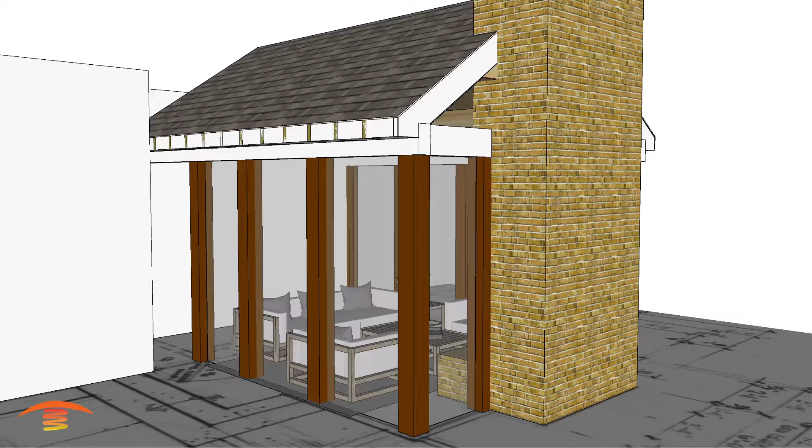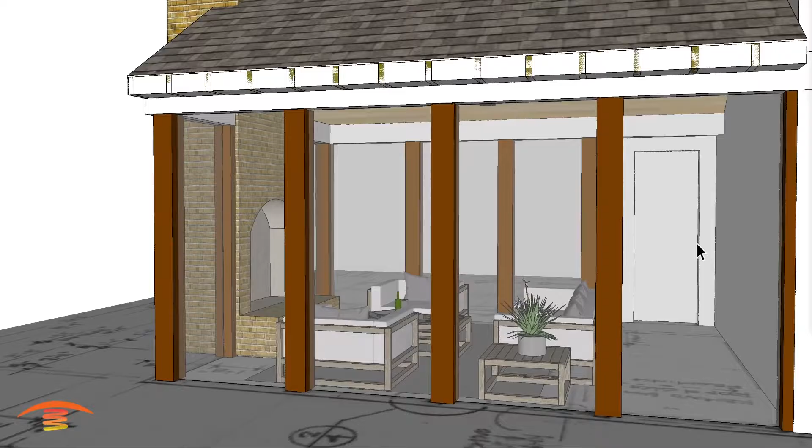Now let's get heating. All right, so here we have this residential screened-in application. And you can see here we have a doorway. I believe there are windows over here. There's a fan here in the center of the room. Fireplace over here, and basically seating for 4. They said I have it for 5, but it's right below the fan itself.

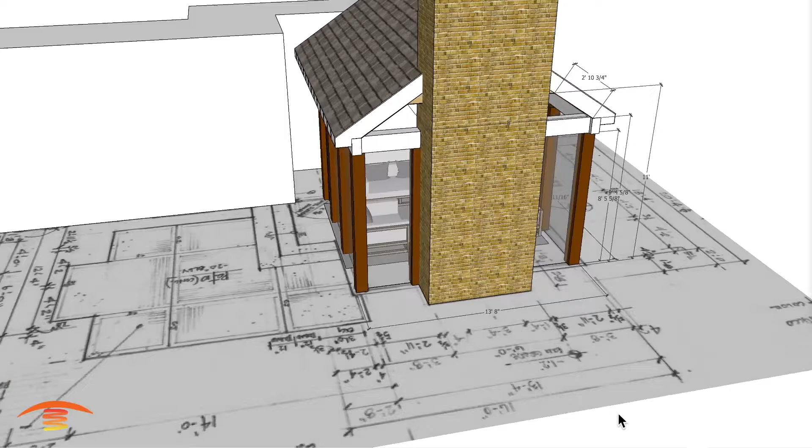And let's go ahead and look at the overall dimensions here. So overall dimensions, you can see here is the floor plan. Total distance that they show is 13.4. I have 13.8 to this edge out here, which is just slightly further out than their point here and here. You can see that my support posts are just slightly further out, a couple inches. But in any case, I try to match it up to the floor plan itself.

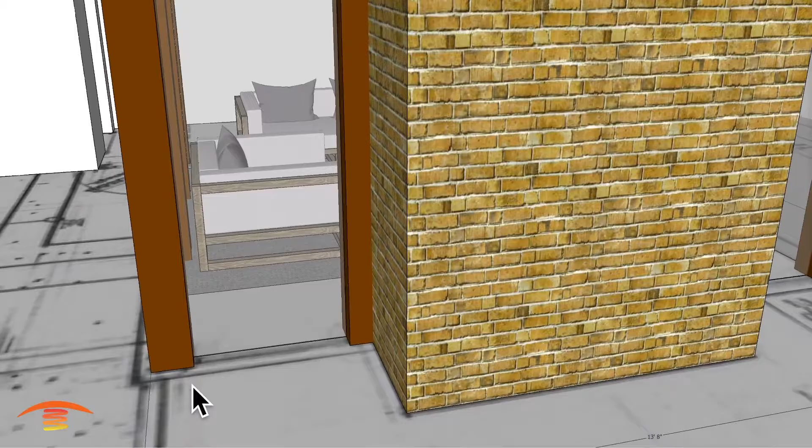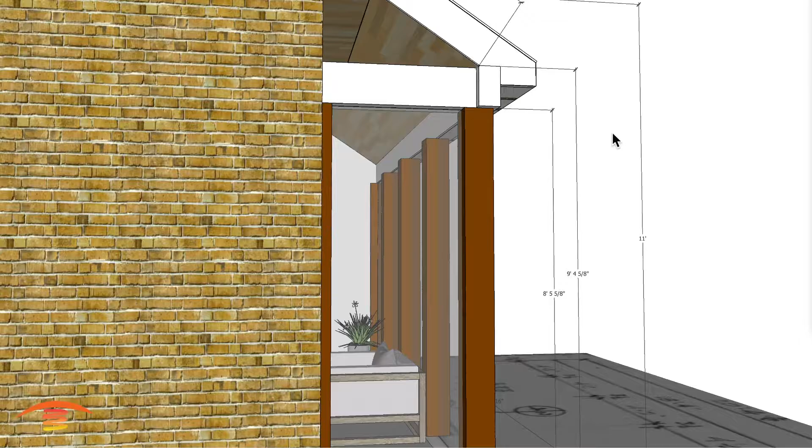We have this 13.8 by 18 almost 4 from the outside edge here to the residence itself. And then we have some different heights here. I have 8'5" to the bottom edge of this beam coming across here, and that one there. And then to the top of that beam is 9'4" and 5/8. And then there's a flat ceiling surface up here that is at 11 feet off the floor. And then a total width over here of approximately 8 feet.

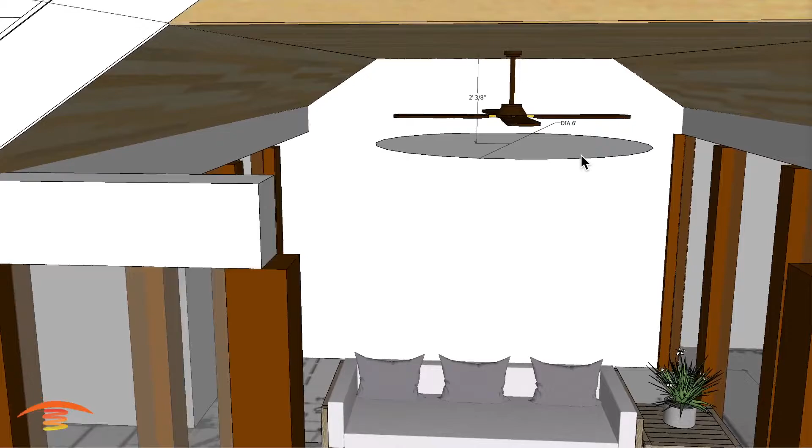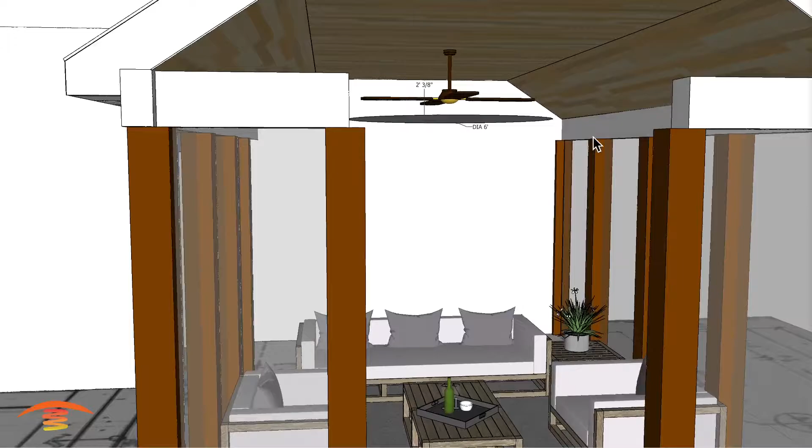I'm gonna go ahead and turn off the fireplace here just so we can see things a little bit better. We do have a fan here in the center, like I said, and I have it at 6 foot diameter. I also have this marking here at 2 foot 3/8 off the ceiling, and I'm just trying to match it up to the edge here, I think is what that truly is. But this slope section here I have at 2 foot 10 3/4, and I believe that's about it.

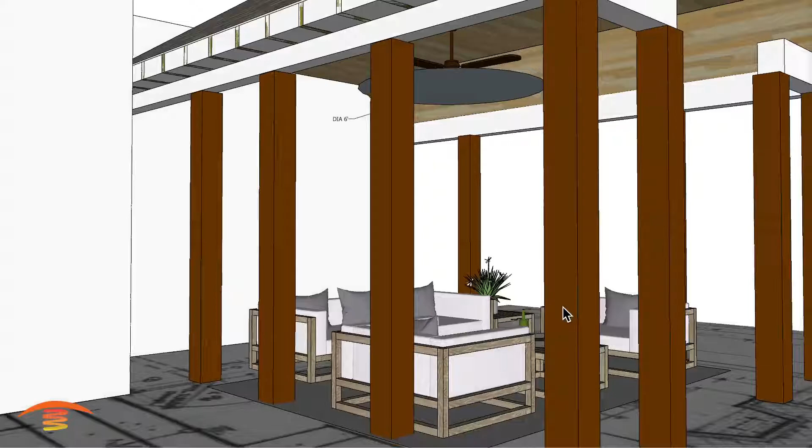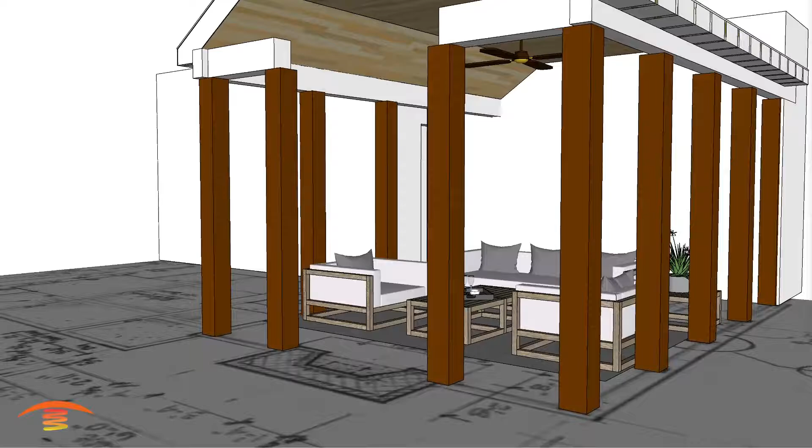I'm also going to turn off the screened-in portion here so we can maneuver through here a little bit easier. So that's all the dimensions, and let's go ahead and look at the different options that we can come up with. So let's turn off the dimensions. And first of all, the client showed heaters that were placed there already on their design. I think it shows over here somewhere, but in any case, they were listed as the WD series. So let's just pop that in here real quick. There we go. And so these are the WD 6024s, so 6,000 watt 240 volts.

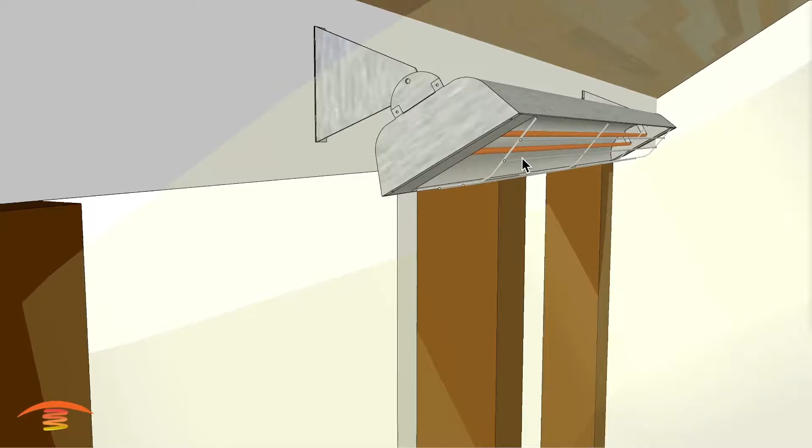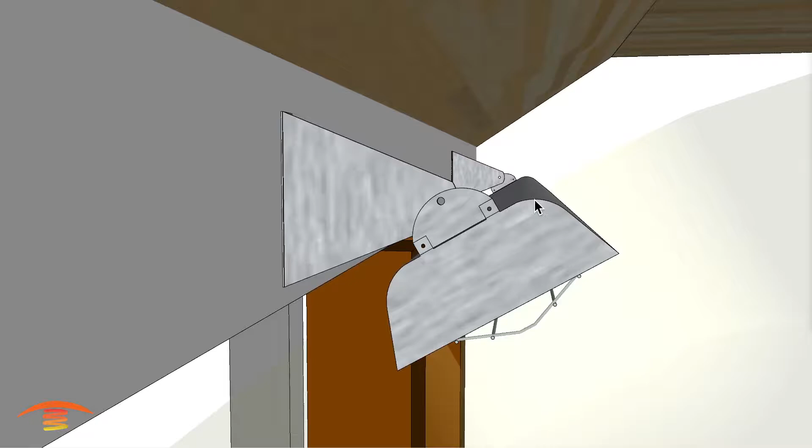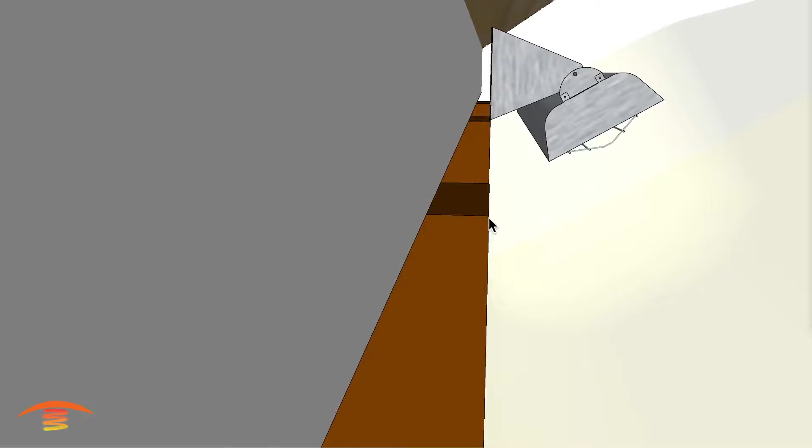The WD series has the brackets mounted on the ends on each side, and also the clearances have to be met: when it's mounted on a vertical surface like this, it has to have 12 inches of clearance to any combustible above it when mounted on a vertical surface and 30 degrees tilt. You can see here my mounting isn't quite right because I'm not sure what these true posts are and what this true beam is, but I matched it up to the inside edge of these posts here so that we can measure it at 12 inches from here to here.

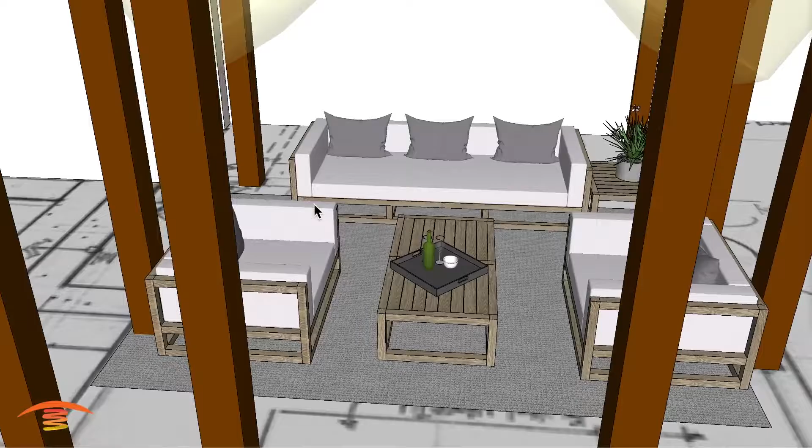It is in the center of the room, and quite frankly, this is a good design. There's nothing wrong with this, especially since they're designed mainly for seating for 4 here. Obviously the fireplace is over here, so seating for 4, this should work out just fine. Let's go ahead and look at the footprint of heat. And I'm going to go ahead and turn off the clearances here. The array itself is fairly good coverage for this whole space.

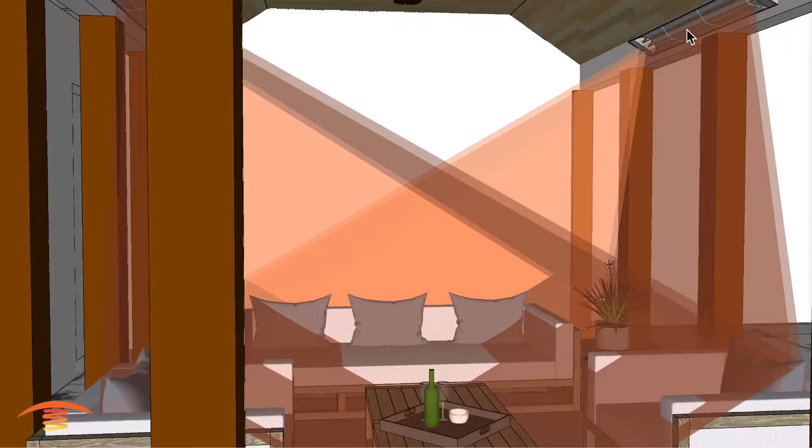6,000 watts, so it'd probably be too warm here in the center. So you might want to use a dimming system or duplex switch where you can turn one element on, one element off on all 4 elements essentially. And or use a controlled dimming system where you can turn it to 100% or 1% on.

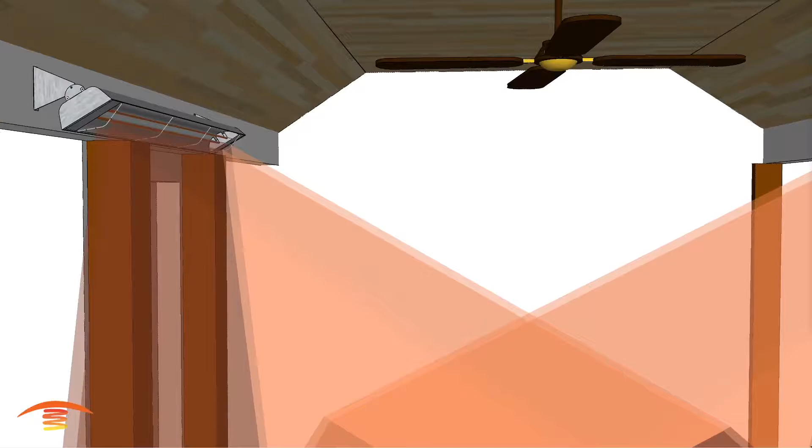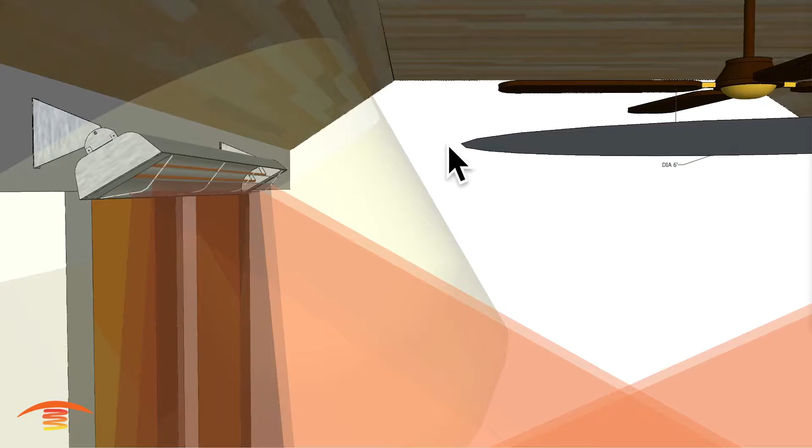So I think I mentioned the clearance here. So clearances, no problem with the fan here at that 60-inch dimension. Let's turn that back on here. We got quite a few more inches to work with, and 6 foot diameter. And let's see if there's anything else here. I think that's about it.

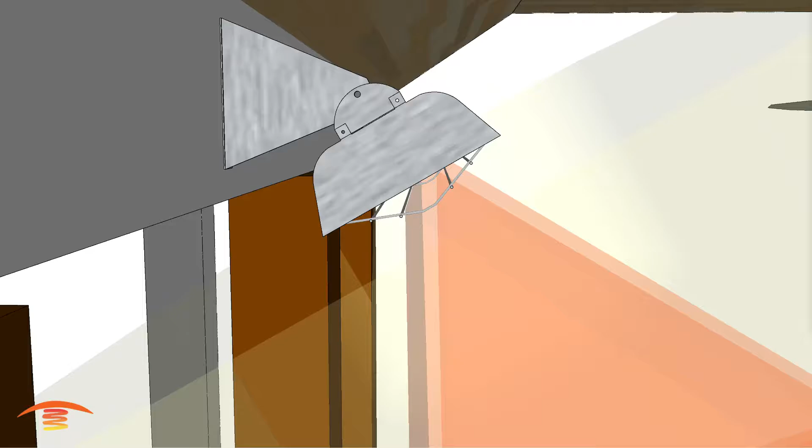So I just also want to show what a CD model would look like. The CD model, just to me, looks a little bit more refined, I guess is the word. And let me just turn off the clearance and the dimensions. And I'm going to turn on the CD6024. So this is a 6,000 watt 240 volt. And I'm going to turn off the WD so you can see what the difference actually is. They're both mounted in the same place.

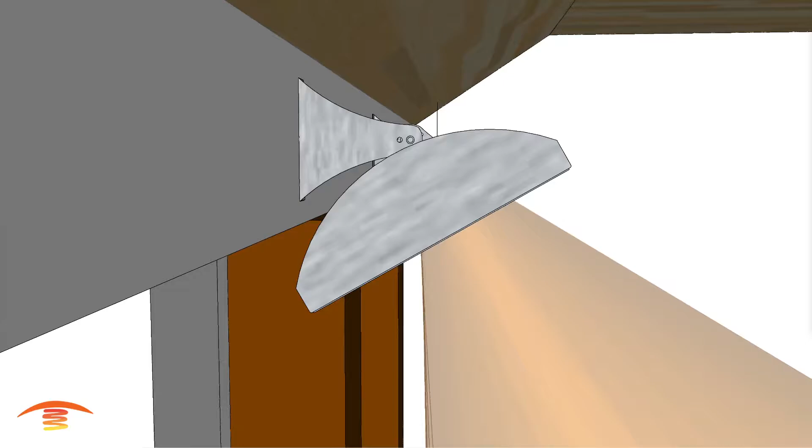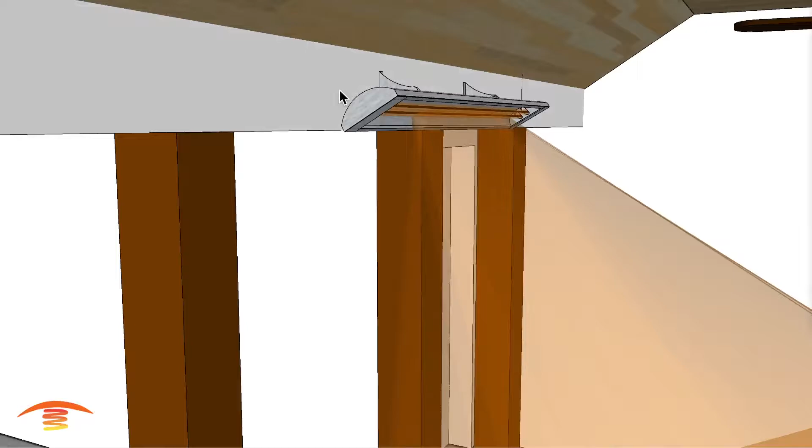Now you can see the CD model has the bracket mounted in from the edge a little bit. They're different on each model, so you'd have to look up the paperwork to see exactly what that dimension might be. But all the clearances are the same, so there's no issue with regards to meeting the clearances of combustibles over here. Let's see here, sorry about this. So yeah, no issue with the clearances over here.

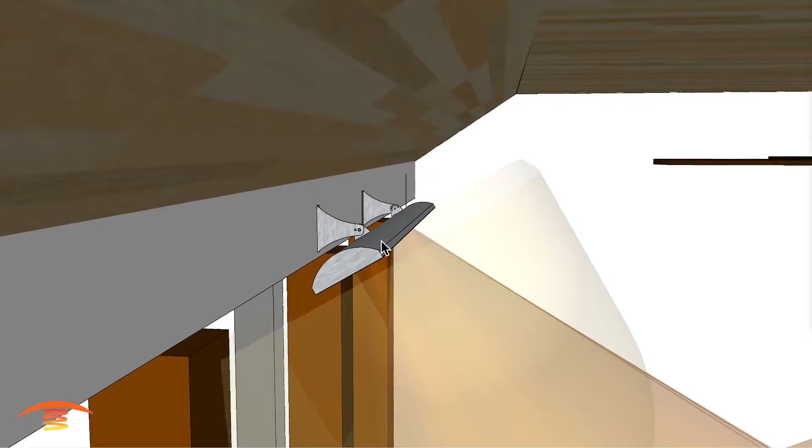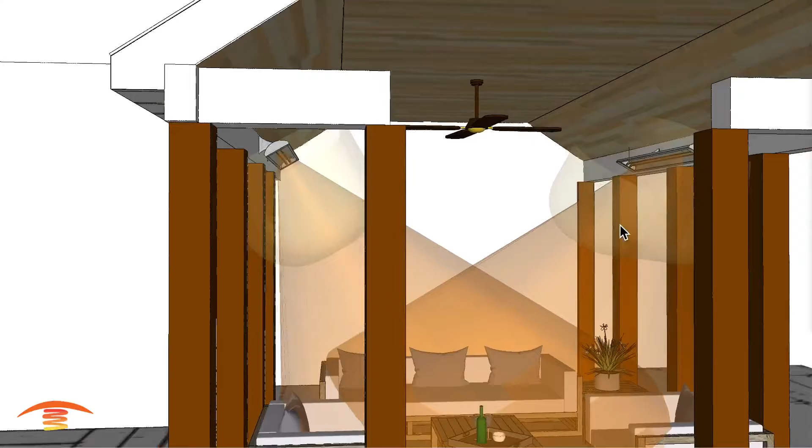And of course, mounting on the vertical surface, you need that 12 inches of clearance above the heater again. So I think that would be okay, and you can see the footprint here is essentially identical to the WD model. All right. And I'd say you'd also want to use a control system or duplex switch to regulate the amount of heat out here.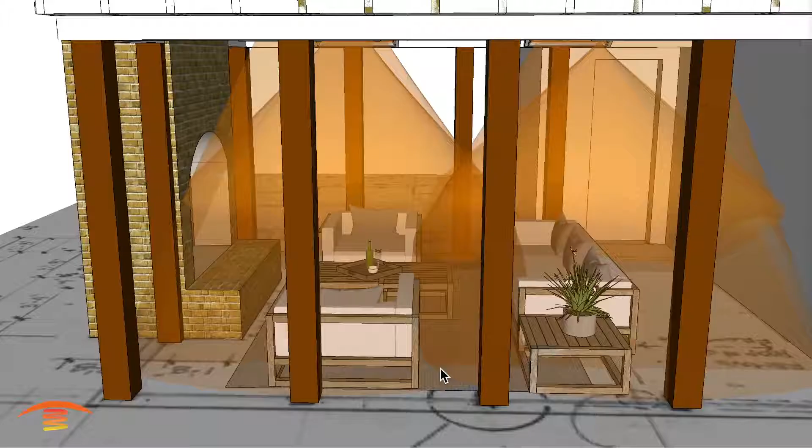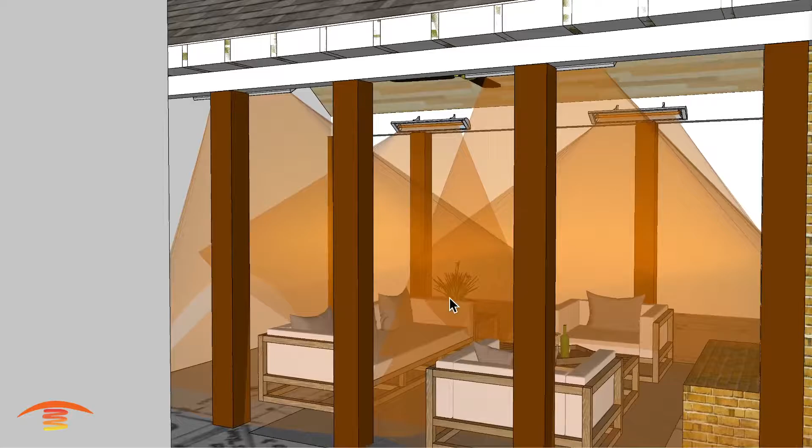So the ray itself, here you can see that we get really good coverage throughout this whole entire space. Let's put that fireplace back on. You can see that we're heating up a little bit of that area as well. But this whole entire space is heated up very well. So if you utilize this for different applications, you know, dining sometimes during the year, and you had more guests here, this would work out really, really well. Also, it gives you a little bit more heat in the entire space as well.

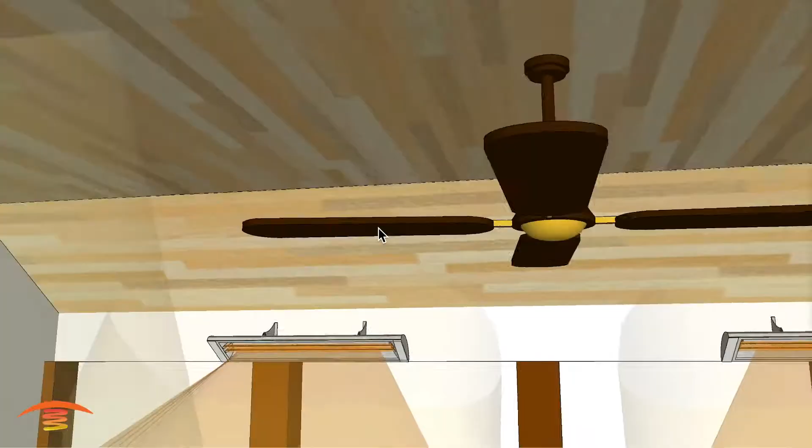You'd also want the control system, but you can see that the placement is exactly identical to the CD6024 that I mentioned earlier, and there's no issue with regards to clearances again. So if we go to the clearances, on the edge, no issue. We got 18 inches from the edge on both sides, and that's true over here as well. So there's no issue with regards to that on the left here. All right. Well, I hope this has helped.